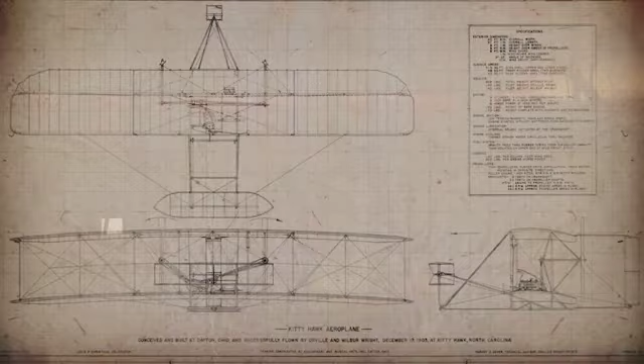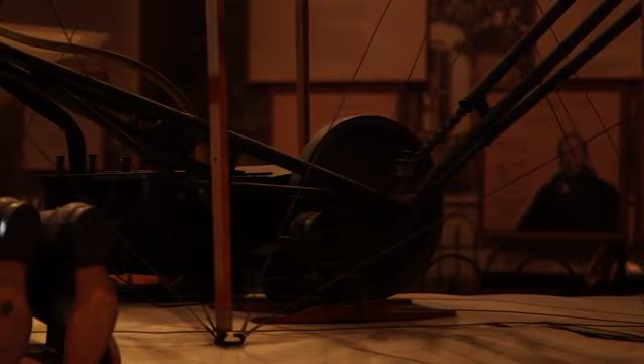The engine they needed had some very specific requirements. It had to be much lighter than most internal combustion gasoline engines of their day, but it didn't need to be very sophisticated, because the Wright brothers had so successfully designed their airplane that they just needed a very low horsepower engine to get it in the air. They designed an engine that was very simple, with no carburetor, no fuel pump, and it generated 12 horsepower, 4 more than their basic design estimate required. So they thought they would be okay. Turns out their airplane was much heavier than their design estimate, so that extra 4 horsepower really came in handy when they attempted to fly.

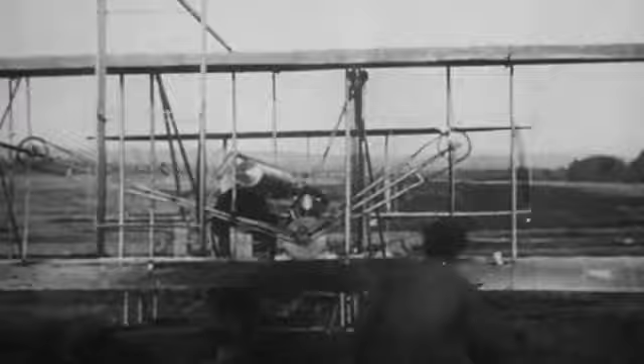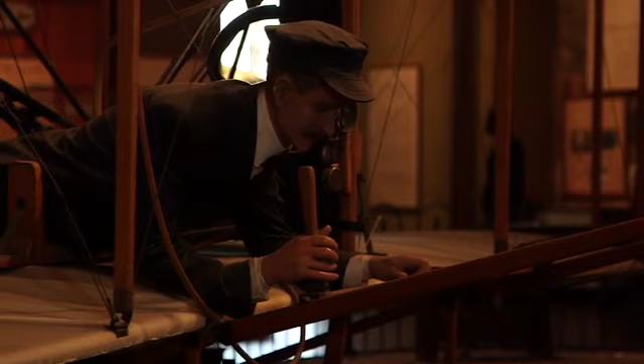The other component of their propulsion system, the propeller, was even more significant, because the Wrights really were the first to conceive of an aerodynamic propeller, as opposed to a ship propeller, which simply pushes the ship along. An aeronautical propeller is really a wing moving in rotary motion, generating a horizontal force we call thrust. Marrying that propeller with their simple internal combustion engine, they created a propulsion system. It's important to think of it as a propulsion system because the Wrights understood that an airplane had many dimensions—a wing, a structural design, a control system, and a pilot—and the propulsion system was one component that had to work together with all the rest. An airplane was not just one invention, it was many inventions, all of which had to work in concert.

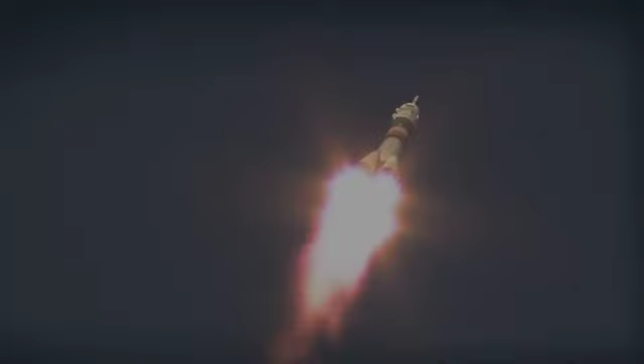Let's take these concepts of lift and drag and apply them to propulsion, which is another of the 4 central forces acting on an aircraft in flight. The entire idea behind propulsion systems is to produce the force needed to move the aircraft through the air, overcoming aerodynamic drag in the process. In modern aviation, there are 2 main types of propulsion systems in use: propeller-driven airplanes, powered by an internal combustion engine, and jet-driven aircraft, powered by turbojet engines, or the often even bigger turbofan engines. We'll focus on propeller aircraft in this lecture and turn our attention to jet engines in the next.

So why have these 2 types of engines emerged to the forefront of aviation instead of other propulsion devices? For example, steam engines were sometimes used in the early days of aviation, but are hardly ever seen today. Or rocket propulsion has been used for some aircraft, such as the Bell X-1, that first broke the sound barrier.

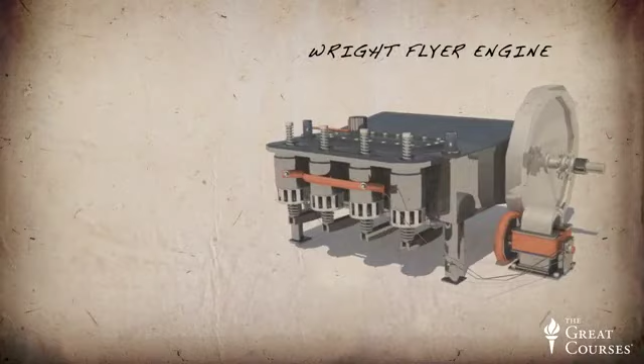It turns out that one of the most important features of a propulsion system is the power-to-weight ratio. We can think of this as a metric for efficiency of the engine—we want to get as much power as possible out of the system while minimizing the weight. This was one of the most critical limiting factors in the early days of aviation. Propulsion systems were available that could produce substantial power, but they were very large and heavy, making them impractical for use on aircraft. Even the Wright brothers' engine had a fairly poor power-to-weight ratio of 1 horsepower per 16 pounds. Following their work, engine performance rapidly improved to values much closer to 1 pound per horsepower. This power-to-weight ratio continues to be a driving design criterion for aircraft designs created today.

What makes jet engines and internal combustion engines so popular is that they operate off of fossil fuels, which have an incredibly high energy density relative to other forms of energy storage. This feature comes back to the problem of weight on an aircraft—the air vehicle must carry around the energy source, that is the fuel, along with the energy conversion device, that is the engine. Other energy storage and conversion methods are available, such as solar cells, fuel cells, batteries, chemical rockets, and even nuclear propulsion.

However, none of these methods can currently match the efficiency and lightweight of using fossil fuels in an internal combustion engine. So in this lecture, we'll focus on how internal combustion engines operate to produce power, and how the propeller transmits that power to the air.

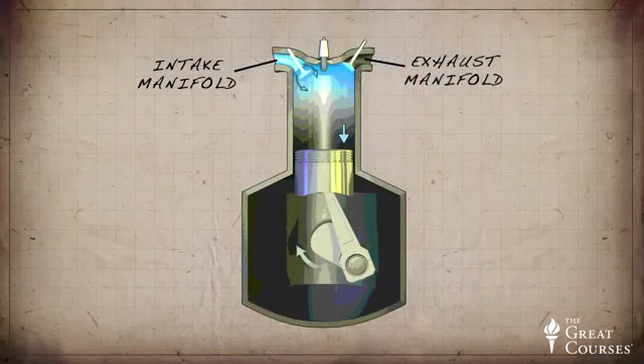Let's start with the discussion of the internal combustion engine. The central function of an internal combustion engine is to convert the chemical energy stored in the fuel to mechanical energy in the form of a rotating shaft. The substantial amount of energy stored in fossil fuels is released by burning the fuel in the combustion event. That energy is then used to push a piston sliding within a cylinder, which then rotates the crankshaft.

Aircraft engines will have a number of cylinders arranged such that each piston is connected to the crankshaft, and the power output from each cylinder contributes to the rotation of the shaft. The firing of the cylinders is timed such that the combustion events are spread evenly throughout the complete rotation of the shaft. The arrangement of the cylinders can be in a radial configuration around the perimeter of the engine, all in a line for the inline configuration, or in a V configuration with 2 rows of cylinders arranged in a V shape.

Let's take a closer look by examining this schematic of a 4-stroke engine. The 4-stroke engine is so named because there are 4 key segments of the entire cycle of its operation. The first stroke of the piston within the cylinder is the intake stroke.

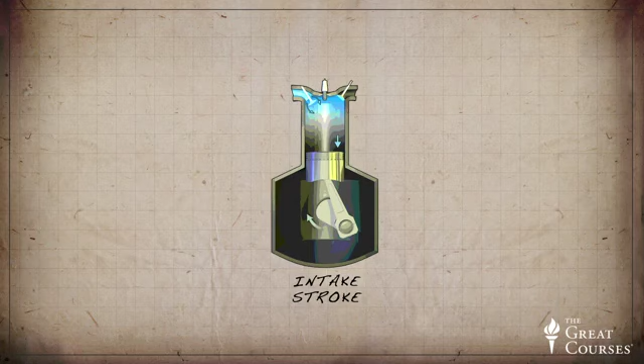During the intake stroke, valves on one end of the cylinder open in order to allow a mixture of fuel and air into the cylinder. The next stroke is the compression stroke, where the piston compresses the fuel-air mixture within the cylinder by decreasing the volume. During the compression stroke, the pressure of the fuel-air mixture increases dramatically.

At the conclusion of the compression stroke, the volume of the fuel-air mixture within the cylinder is at a minimum, and the pressure is at a maximum, and the spark plug is fired. With the firing of the spark plug, the volatile fuel-air mixture ignites and rapidly releases the energy through this combustion event. That combustion process rapidly and substantially increases the pressure of the contents within the cylinder.

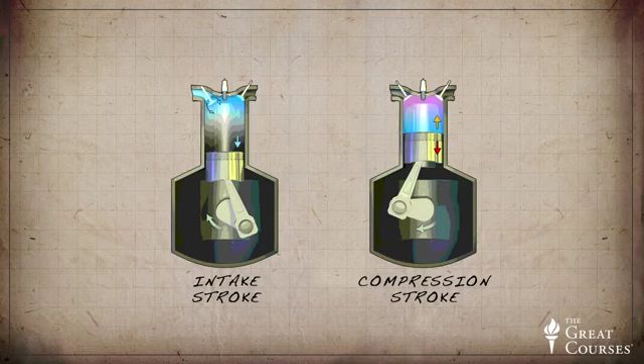This higher pressure then applies a very strong force on the face of the piston, pushing it back down through the cylinder. From the point of spark plug ignition, the third stroke of the piston initiates. This portion of the cycle is called the power stroke, which is when all of the energy from the combustion event is used to force the piston downward, increasing the volume of the mixture.

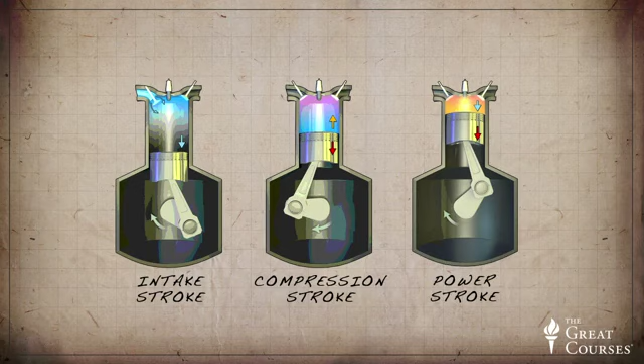The energy from the combustion event is transmitted to rotation of the crankshaft by the piston and its connecting rods. Following the conclusion of the power stroke, the fourth and final stroke initiates when the piston is at the bottom of its stroke. A second set of valves opens, allowing the byproducts of the combustion event to be exhausted from the cylinder. The piston moves upward, pushing the combustion products out of the cylinder through the exhaust manifold.

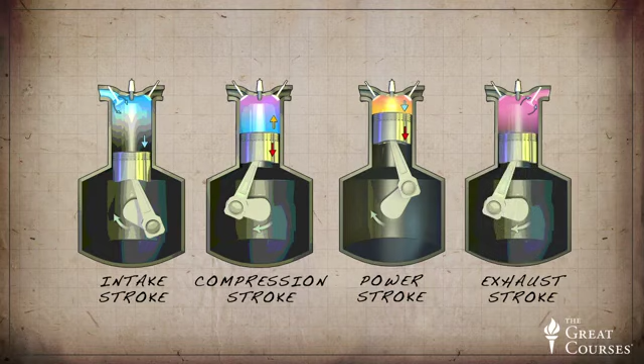So, in summary, a 4-stroke engine is composed of the intake stroke, the compression stroke, the power stroke, and the exhaust stroke. Let's take a deeper look at the function of the internal combustion engine by considering a plot of the pressure versus the volume of the contents within the cylinder. We call this a PV diagram.

If we plot points on this diagram corresponding to each stroke of a 4-stroke engine, we can see how the pressure and volume varies throughout the cycle of the engine. From that, we will be able to see how much work the engine is producing and what we might be able to do to improve the performance of an engine.

If we begin with the start of the intake stroke, we'll note that as point 1 on the PV diagram. As the piston moves, the pressure within the cylinder remains approximately constant because the intake valve is open. However, the volume of the contents increases substantially due to the movement of the piston. Let's mark the conclusion of the intake stroke as point 2.

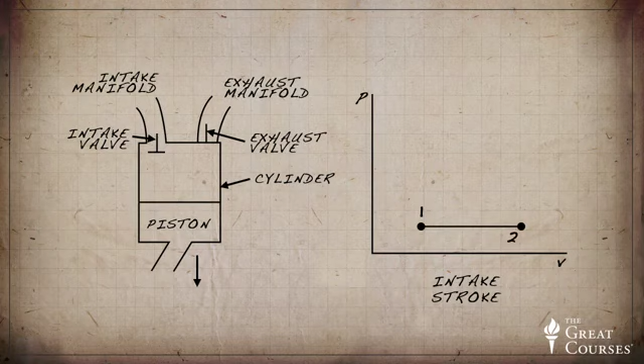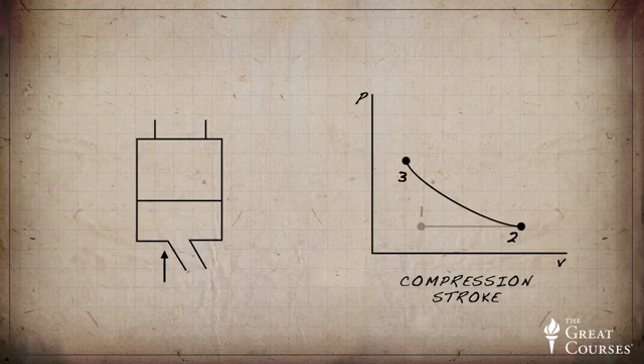Now, moving into the compression stroke, the volume again decreases due to the upward movement of the piston, and the pressure increases at the same time. This is because all of the valves on the cylinder head are closed, and the contents of the cylinder are compressed. The conclusion of the compression stroke is noted as point 3. The power stroke will be represented by 2 segments. The first is the combustion event, represented between points 3 and 4 on the PV diagram.

Here, the spark plug is ignited, and the contents of the cylinder are rapidly burned. This combustion process takes place within a very small fraction of the overall cycle. The pressure within the cylinder dramatically increases due to the release of chemical energy in the combustion event.

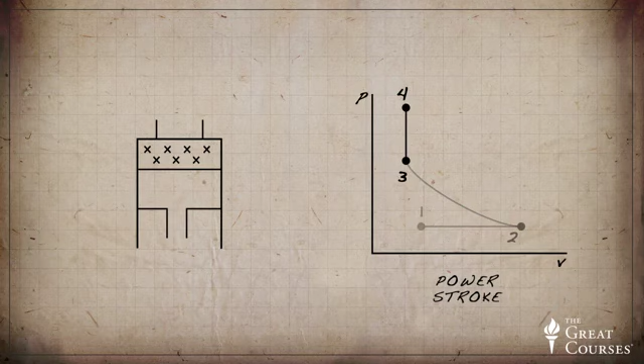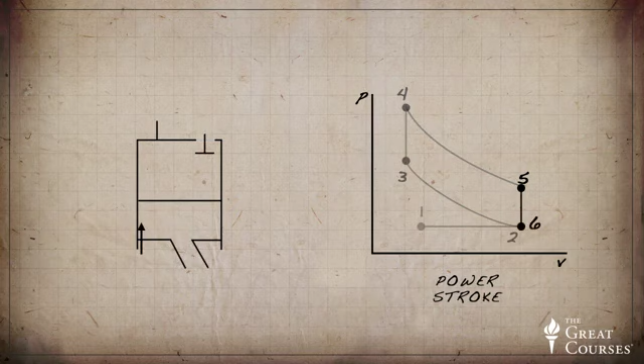The power stroke then continues, moving from point 4 to point 5, where the volume of the cylinder is increased as the high pressure pushes the piston downwards. At the conclusion of the power stroke, the exhaust valves are opened, which quickly relieves the pressure within the cylinder, so the pressure drops from point 5 to point 6.

This marks the beginning of the exhaust stroke, which continues from point 6 back to our initial condition of point 1. Between point 6 and point 1, the volume of the cylinder decreases and the pressure remains constant as the piston pushes the exhaust gases out of the cylinder to refresh the conditions for the next combustion event.

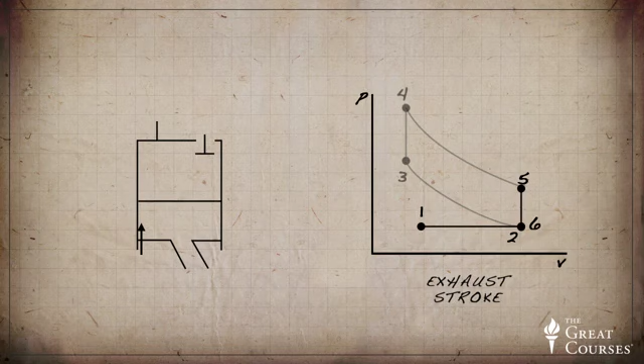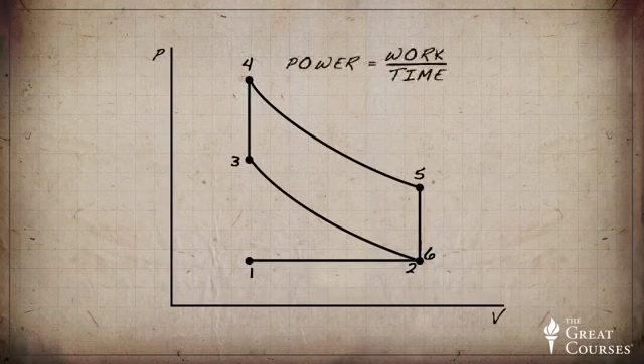Now, this PV diagram can tell us some important things about how the engine performs. Power is defined as work per unit time, and mechanical work is equal to the force times the distance that the object is moved. So to maximize power output, we need to maximize the force applied to the piston and the distance that the piston moves, while doing that within a minimal amount of time.

Here, the force acting on the piston head is related to the area of the piston face, the cylindrical cross-sectional area, and the pressure acting on the piston, since pressure is force per unit area. So higher force will result from higher pressure acting on the fixed surface area of the piston face.

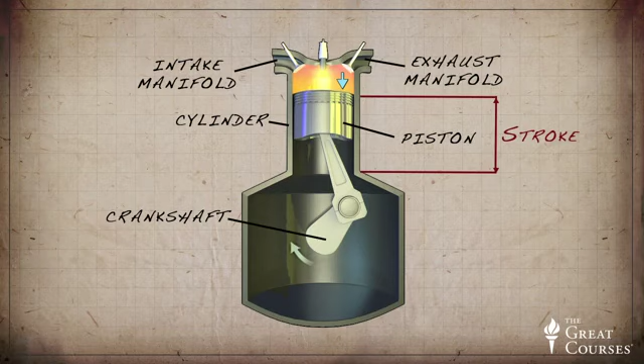The distance that the piston moves is called the stroke. Larger stroke results in larger displacement and more work done. Stroke is also related to the displacement of the cylinder, which is basically the volume of the cylinder swept by the movement of the piston head.

Keeping these ideas in mind, we see that we want to increase the pressure excursion between maximum and minimum pressure acting on the cylinder, and we want to increase the volume swept by the piston in order to maximize power. Based on these thermodynamic principles, it turns out that the amount of work done by the gases inside the cylinder on the piston is equivalent to the area encompassed by the cycle from points 1 through 6.

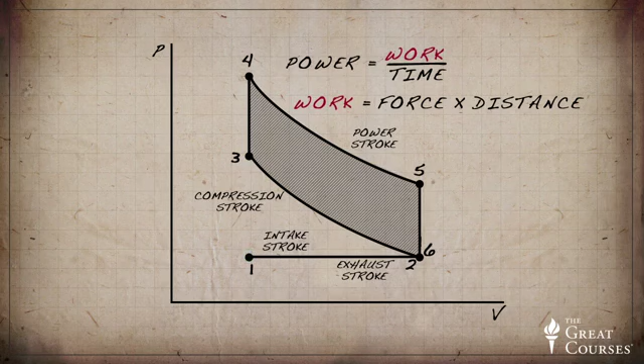Before the ignition event, during the compression stroke, the pressure and temperature increase because the movement of the piston is adding energy to the air, because it's doing work. And following the ignition, the air in the cylinder does a lot of work on the piston, with a net positive work output.

Let's take a look at how the temperature of the air in the piston changes throughout the cycle through a demonstration. I have a small cylinder with a piston that I'm going to use to compress the air inside. I also put a bit of tissue paper inside, which will help us visualize what is happening to the air temperature. My goal is to burn the paper.

But let's see if the temperature will get hot enough. How hot does it need to be? Well, if you've ever read Ray Bradbury's Fahrenheit 451 novel, you'll probably recall that the combustion temperature of paper is 451 degrees Fahrenheit. Let's see if we can get that hot.

Wow, very nice. So if we assume that all of the energy I put into the cylinder through work went into heating the air inside, then thermodynamics tells us that the temperature rose to over 1,000 degrees Fahrenheit. So the compression stroke is definitely adding energy to the air in preparation for ignition.

Now let's consider the impact of pressure in a little more detail. The pressure that the engine can supply to the cylinder is directly related to the ambient air pressure. You'll recall from our second lecture that atmospheric pressure decreases as we go up in altitude. So naturally, the power that can be produced by an engine diminishes as an aircraft climbs to higher altitude.

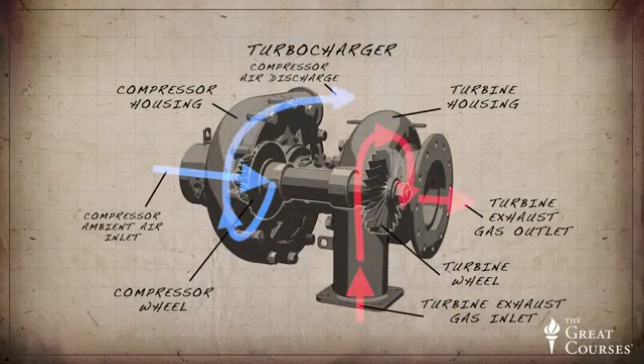This is exactly what can be done with a supercharger or a turbocharger. These two devices essentially perform in the same way. Each boosts the pressure and density of air delivered to the intake valve with a compressor.

We're at the Aviation Institute of Maintenance in Manassas, Virginia, where we're going to talk about the turbocharger and the supercharger. The function of these is to deliver high-pressure air to the intake manifold to be able to fly an aircraft at high altitudes, because we have to have enough air for the combustion event.

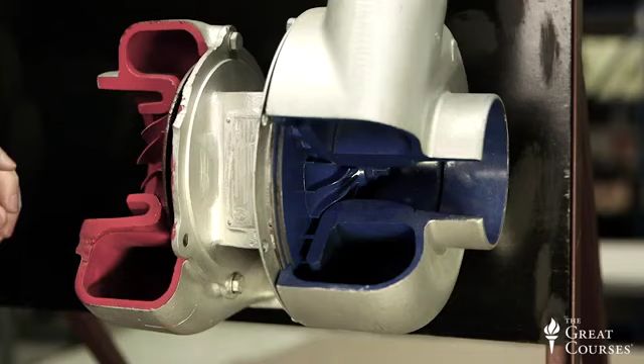The turbocharger actually operates off of the waste energy in the engine exhaust. That exhaust gas comes through and is passed through this turbine right here. As it passes through the turbine, it's pulling energy out of that exhaust and driving a shaft connected to the compressor here. The compressor turns and sucks in air through the inlet here and is a radial compressor and sends it back out to this radial exit here to deliver high pressure air to the intake manifold.

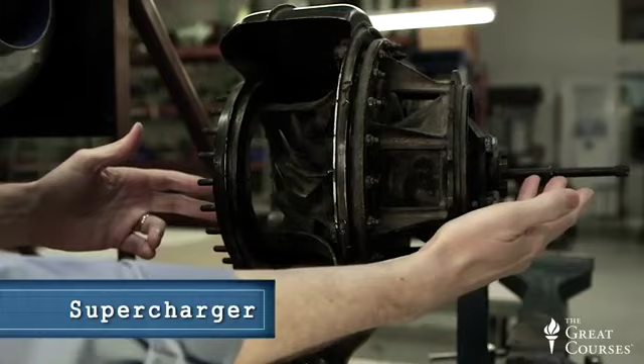Compare that with the supercharger, which instead of driving off the exhaust gas has a shaft here connected to the main drive of the engine to drive the compressor, but otherwise the function is the same. It pressurizes the air through this radial compressor to deliver that high pressure air to the intake manifold.

So let's consider the implications of what we found. Higher displacement or volume of the cylinder will result in higher power output. Also, the more cylinders we have working together, the higher the power will be. And the faster the cylinders fire, the more work is done per unit time, so the power output of the engine goes up. Finally, higher pressure allows more fuel to be burned and will give higher power output.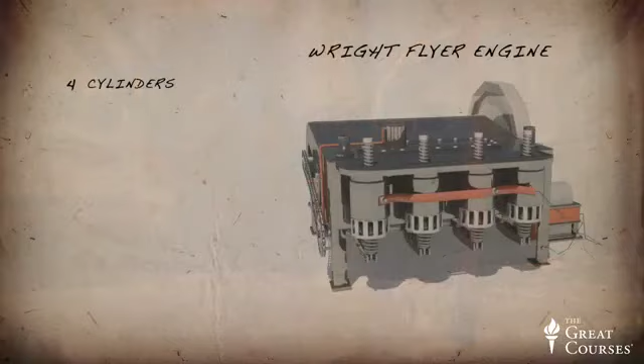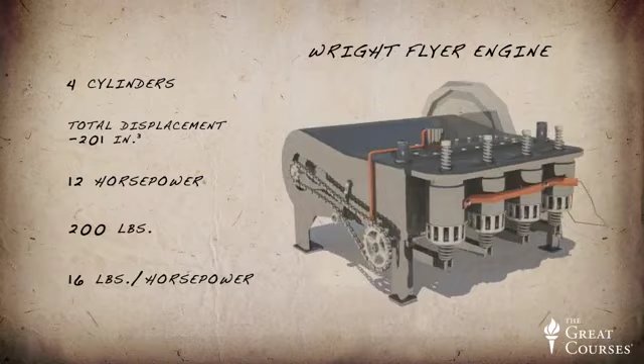These factors are reflected in the progression of engine technology that we've seen in engine development. The Wright Flyer's engine had 4 cylinders with 201 cubic inches of total displacement. The engine produced about 12 horsepower with a weight of 200 pounds, giving it a power loading of about 16 pounds per horsepower. Compare this with the stats of the Rolls-Royce Merlin, a liquid-cooled V12 which was used on the

P-51 in World War II. This engine had 12 cylinders, each with 137 cubic inches of displacement. This packed much more punch, giving 1,580 horsepower while weighing in at 1,640 pounds. The power loading of the Merlin was 1.04 pounds per horsepower, much better than that of the Wright's engine.

One of the major drivers of engine technology that we haven't yet addressed is the vexing problem of how to cool the engines. The combustion events produce a significant amount of heat, which is directly transferred from the combustion gases to the cylinder walls. This heat must be effectively removed from the engine in order to prevent warping of the cylinder head and ultimate destruction of the engine.

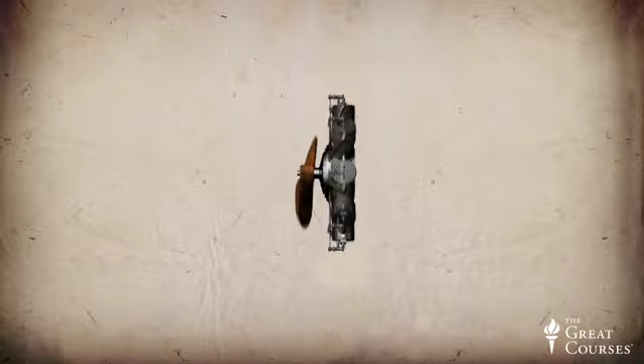Two key cooling technologies are convective cooling via airflow over the cylinders or liquid cooling via circulation of coolant around the cylinder heads. Each of these techniques can substantially increase the weight of the engine, and so engine cooling was a key area of technology development that improved engine performance in the early days of aviation.

The engine that the Wright brothers used on their 1903 Flyer employed evaporative cooling of a fluid. It turned out that this technique wasn't very efficient and only enabled operation of the engine for a period of several minutes before the engine overheated.

Engine designs in the earliest days of aviation then quickly pivoted to air cooling, which involves direct airflow over fins mounted on the cylinders. In order to maximize the flow of air over the cylinders, the radial engine was invented, where each cylinder was equally exposed to the oncoming flow.

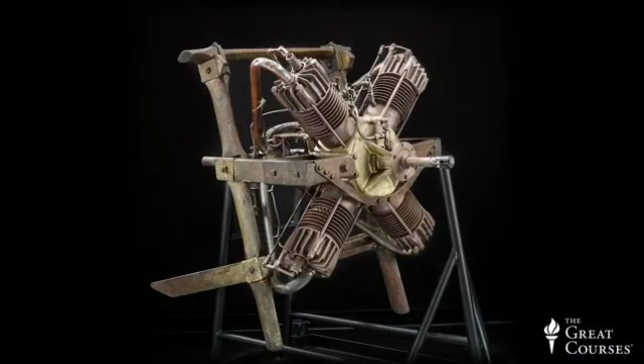However, air-cooled engines had the limitation of limited cooling when the aircraft was on the ground or in low-speed flight. This frustration led to the ingenious development of the rotary engine, which rotates the entire engine around the crankshaft. This afforded the advantage of continuous movement of the cylinders relative to the surrounding air, resulting in air cooling even when the aircraft was stationary on the ground.

Ultimately, however, the rotary engine suffers from mechanical problems associated with rotating the entire engine assembly due to the very high inertia associated with rotating a heavy engine. The size and ultimately total power output of the engine was limited. Furthermore, there were challenges associated with effective lubrication and reliability. Thus, the rotary engine quickly fell out of vogue near the end of World War I.

Despite these challenges of air cooling, radial air-cooled engines continued to be used throughout the interwar era. The 200 horsepower Wright J5 Whirlwind engine was used by Charles Lindbergh on the Spirit of St. Louis and won the Collier Trophy in 1927 for its advancements to the state-of-the-art in engine technology. Also, due to the robust nature of air-cooled designs, with fewer moving parts, the engines tended to have robust performance. For this reason, the US Navy used many air-cooled designs throughout the interwar era and into World War II.

Liquid cooling is the other major method for removing waste heat from the combustion process. The huge advantage of liquid-cooled engines is that airflow over the engine block is not required for cooling. This allows for effective cooling no matter what the speed regime is. Sudden changes in power level and accompanying thermal stresses due to changes in air cooling are not a significant problem. Furthermore, the cylinders can more easily be arranged in line without worrying about maintaining undisturbed airflow over subsequent cylinders. A long arrangement of inline cylinders produces a much more slender engine block, which allows the aircraft fuselage to be more streamlined with less drag. For this reason, liquid-cooled engines were very popular with military aircraft designers, where speed was of paramount importance.

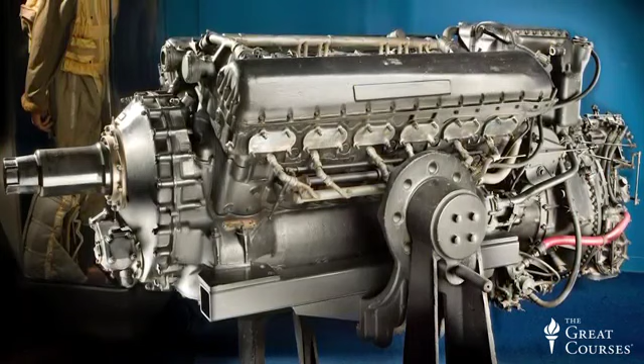A good example of this type of engine is the Rolls-Royce R, a V12 supercharged liquid-cooled engine with 2,239 cubic inch displacement and 2,350 horsepower at 3,200 RPM. With a weight of 1,640 pounds, it had a power loading of 0.65 pounds per horsepower. This beauty of an engine was tightly integrated into the Supermarine S6B, which was flown at 340 miles per hour to claim the 1931 Schneider Trophy for the fastest seaplane.

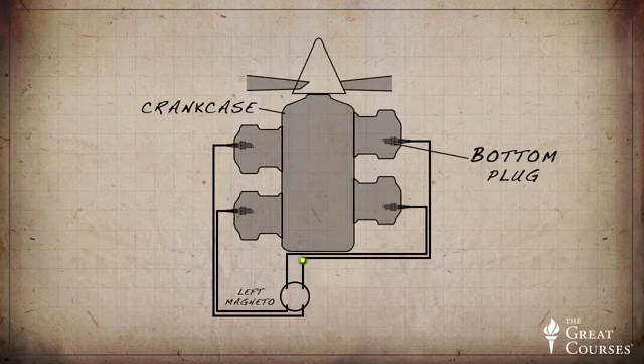Now, as we wrap up our discussion of internal combustion engines, let's touch on the topic of how the spark plugs are fired. Unlike car engines, which distribute power to the spark plugs via the car's electrical system, an aircraft can operate with absolutely no electrical power on board. This is done through the use of ignition magnetos, which generate pulses of high voltage by the rotation of permanent magnets. The magnetos will produce electrical pulses needed to fire the spark plugs as long as the engine is rotating.

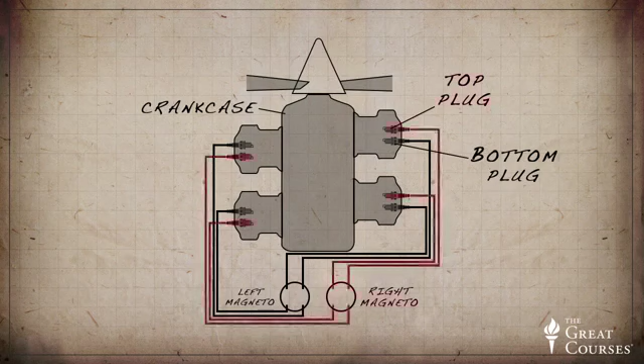Since redundancy is so important on an aircraft, nearly every engine has 2 spark plugs for each cylinder, as well as dual magneto systems. If one spark plug gets fouled, or if one magneto set fails, the other should keep on operating and producing enough power to make it safely to an airport.

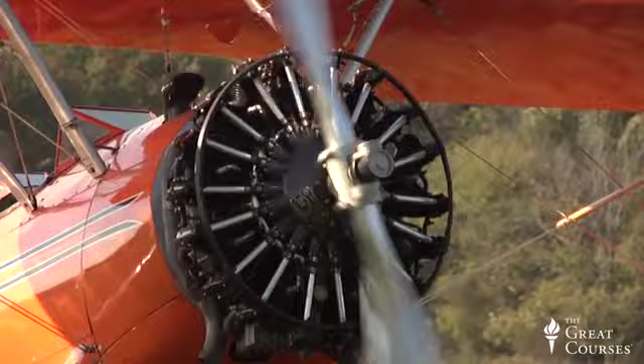For aircraft such as older versions of the Piper Cub that have no electrical power on board, the propeller must be initially rotated through some means in order to get the engine started. This can be done with a pilot in the cockpit, holding the brakes tightly, and a buddy who hand rotates the propeller and quickly ducks out of the way as the engine fires up.

For those aircraft that do have an electrical system, the engine can be started via an onboard battery and starter. However, the magneto ignition system is still used, since it adds a level of robustness and safety. The magneto ignition system allows the engine operation to be entirely self-contained and independent of the aircraft's electrical system.

I speak from personal experience, having found that this level of redundancy is extremely helpful. One time on a night flight, I experienced an electrical system failure in flight. The alternator failed, and the battery completely drained over time. Despite this, it was very comforting to know that the engine would keep on humming along without missing a beat, even without the electrical system being present. I just had to find my way home in the dark.

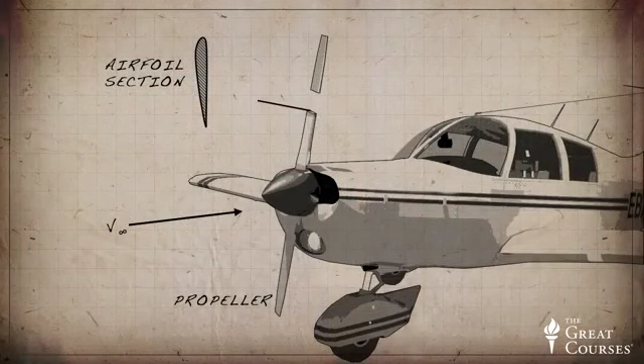Let's now turn our attention to the propeller. Once we've generated all of this horsepower at the shaft of the engine, the propeller is what transmits that power to the flow to actually pull or push the aircraft forward. We can think of the propeller as simply a rotating wing, composed of a series of airfoils that produce lift. Since the airfoils are rotating about the longitudinal axis of the aircraft, the net lift force produced by the propeller results in thrust that is oriented in the direction of flight.

It may seem like a simple concept, but there is some nuance to how a propeller is designed and operated. We'll consider 2 key ideas about propellers. First, if you've ever looked at a propeller up close before, you've noticed the twist of the blade from the root to the tip.

Here's the twist of the blade from the root to the tip. Second, it turns out that the efficiency of the propeller depends significantly on the forward flight speed and the rotational speed of the propeller. Even though there are efficiency problems at off-optimal conditions, there is a way of working around that. So let's dive in.

Now, it's important to set the correct vantage point for thinking about propellers. Even though they are sometimes referred to as air screws, it's not accurate to think of a propeller as screwing through the air as though the air were a solid mass. Instead, it's best to think of the propeller as a rotating wing. It is this rotating wing that produces the lift that accumulates into an overall thrust vector that propels the aircraft forward and overcomes aerodynamic drag.

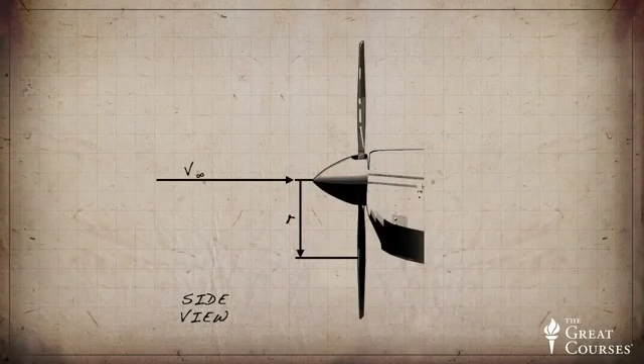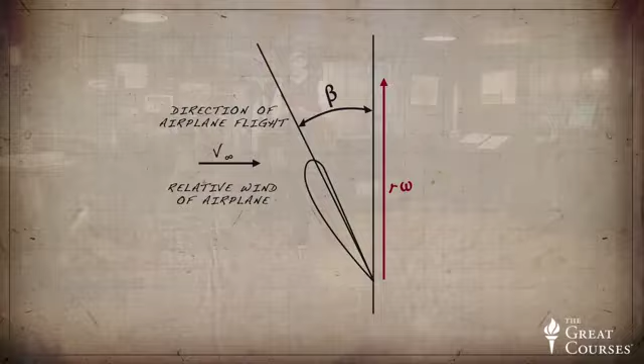We'll need to take a look at the propeller performance by considering individual cross-sections of the blade. Each cross-section is an individual airfoil. However, the velocity seen by the airfoil has some significant differences from what is seen by the wing. Since the propeller is rotating, the net velocity at the airfoil section is a combination of the aircraft's velocity with the tangential speed of the propeller at that spanwise location. This tangential speed is the angular speed times the local radius.

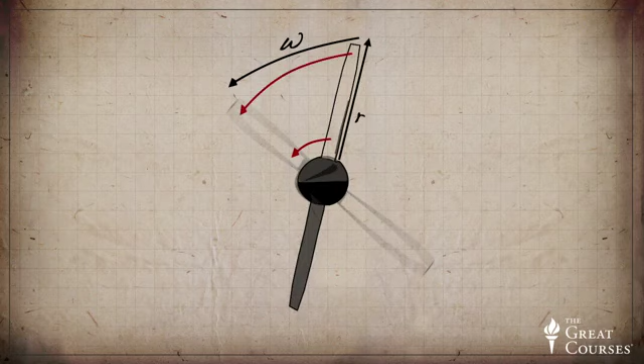For locations on the propeller blade that are very close to the hub, the tangential speed is very low since the radius is small. However, at the propeller tip, the tangential speed is at its highest since the radius is at the maximum extent. It turns out that this spanwise variation in tangential speed has a significant impact on the propeller's design. The best way to understand this is to visualize the local velocity seen by a particular airfoil section along the propeller span through the use of velocity triangles.

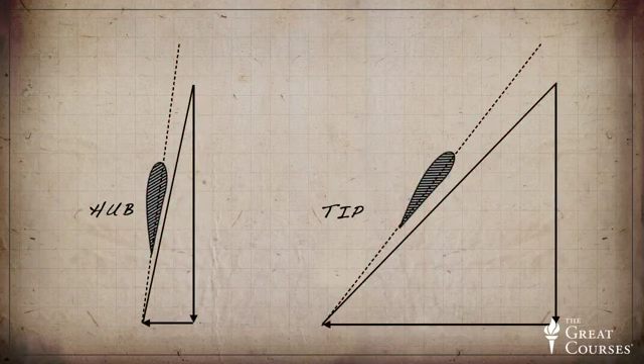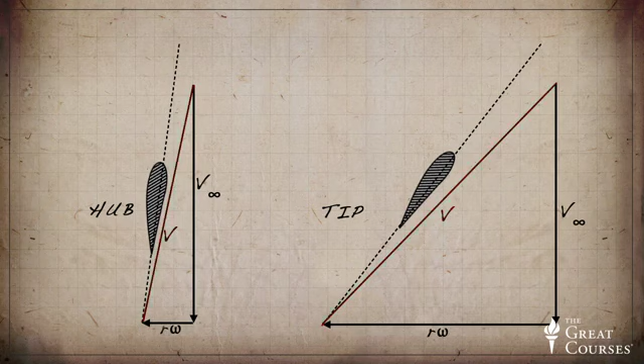Let's consider two spanwise locations, one near the propeller hub and one near the propeller tip. At each location, the aircraft's flight speed is the same, which we'll indicate as v infinity. The tangential speed at the hub is very low, since the radius there is small. When we add these two velocity vectors together in a head-to-tail fashion, we can draw the hypotenuse of the triangle to indicate the net velocity experienced by the propeller airfoil section at that location. At the hub, since the tangential velocity is so low, the angle of the net velocity vector is very high with respect to the plane of the propeller's rotation. At the prop tip, however, the tangential velocity is very high, making the angle much shallower with respect to the propeller plane.

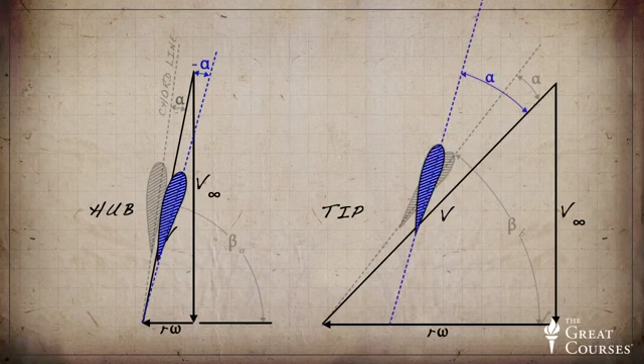Now, if the propeller's airfoil sections all had the same pitch angle, the angle of attack of the flow at the propeller hub would be very low. In fact, the angle here would likely be so low that it would be negative, producing extra drag instead of thrust. At the blade tip, on the other hand, the angle would be so high that the local flow would be separated and the tip would be stalled. Thus, the blade must be twisted in order to optimize the airfoil pitch angle relative to the local angle of attack.

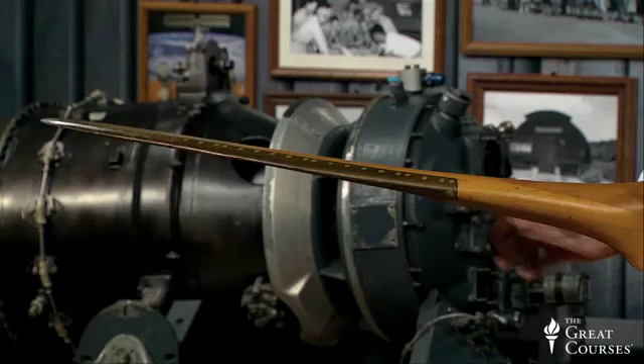At the blade root, where the angle with respect to the prop plane is so high, the blade must be pitched to a very high angle in order to get a reasonable angle of attack. As the location along the span is increased, the flow angle decreases and the blade pitch angle must be reduced in order to maintain the same appropriate angle of attack. Thus, the blade pitch angle changes along the span from very high pitch angle to a very shallow pitch. This is due to local variations in flow angle. This twist of the blade is characteristic of every propeller on an aircraft.

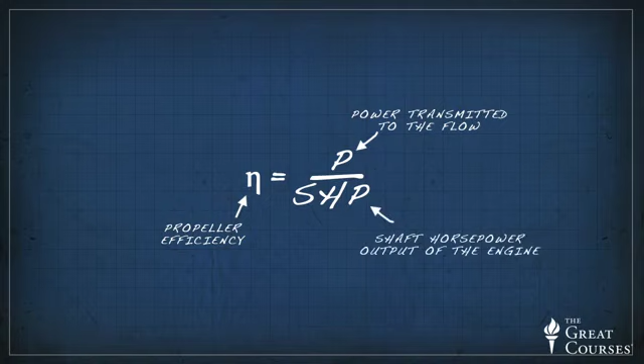Let's now talk about the efficiency of the propeller. We can define efficiency as the ratio of the power supplied to the flow divided by the shaft power produced by the engine. It's an indicator of how well the propeller does its job of transmitting the engine power to the flow. For a well-designed propeller operating near optimum conditions, the efficiency can be near 85%. It turns out that there is an optimum flight condition where the efficiency of the propeller is optimized.

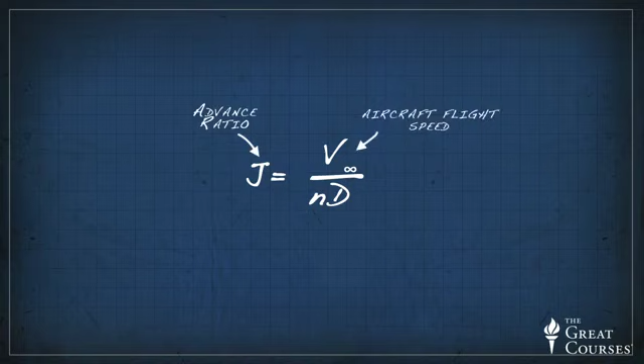In order to effectively describe this optimum condition, we need to introduce a non-dimensional parameter that is a ratio of how far the propeller moves forward divided by how far the propeller rotates around its radius. This parameter, termed the advance ratio, is determined as a ratio of the aircraft flight speed divided by the product of the rotational speed and the diameter of the propeller.

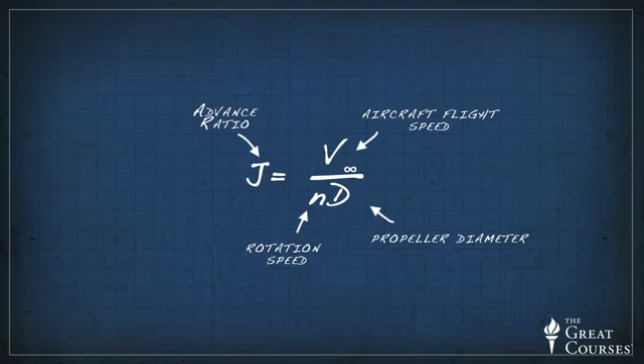At low advance ratios, the flight speed of the aircraft is very low relative to the prop rotational speed, while at high advance ratios, the flight speed is high relative to the rotational speed.

We can now introduce the characteristic propeller efficiency curve for a propeller. This is a plot of propeller efficiency versus the advance ratio.

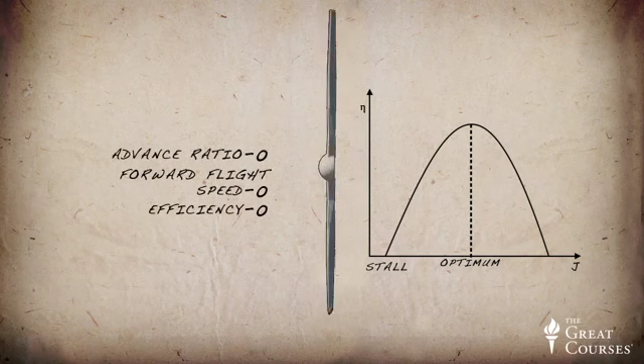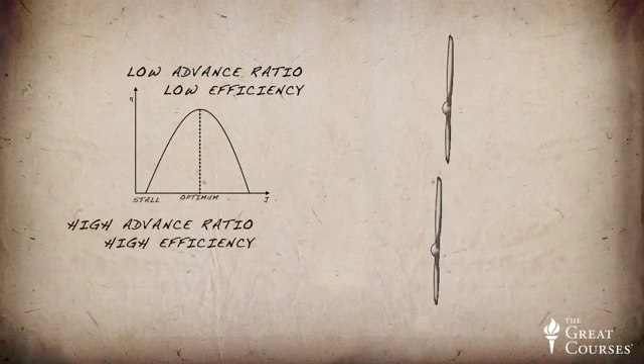When the advance ratio is 0, the forward flight speed is 0, so no thrust is produced and the efficiency is 0. Essentially, at low advance ratios, the flow over the propeller is predominantly stalled, so the efficiency is very low. As flight speed goes up, the angle of the relative velocity vector goes down, the angle of attack decreases, and the flow angle approaches the optimum angle across the span of the blade.

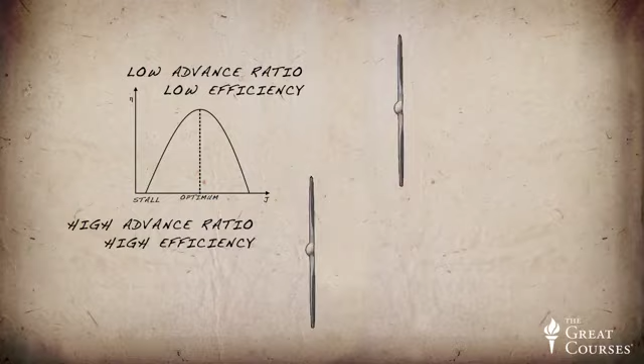At peak efficiency, we can say that a well-designed blade will have optimum angle of attack across the span of the blade, where the maximum amount of lift is being produced by each airfoil section.

The prop efficiency must always be less than unity, since there will always be drag, even at the optimum condition. This drag takes the form of both parasitic drag and induced drag.

Now, when we move to even higher advance ratio, the efficiency begins to decrease again from the optimum condition. This is because the flow angle is increased such that the angle of attack over some portions of the blade is negative and lift is lost.

In fact, the local angle can become so low that drag is produced over some portions of the span instead of thrust. The overall efficiency drops off rapidly with increasing advance ratio until the point where efficiency drops to zero.

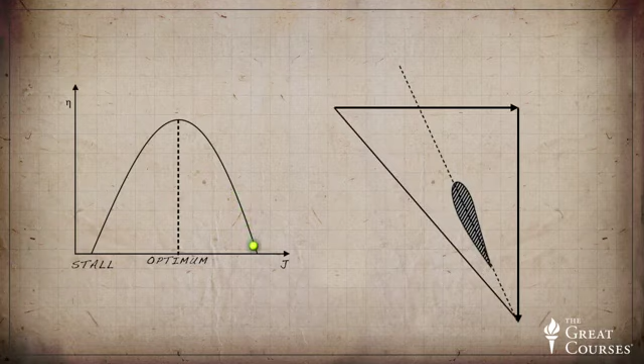At even higher advance ratios, the propeller actually acts as a windmill, producing net drag instead of thrust.

So clearly, there is an optimum advance ratio that should be flown for a fixed pitch propeller. However, it's not easy to change the rotation speed of the propeller without changing the power output from the engine. Most propellers are directly mounted to the crankshaft without any gearing, due to the simplicity of this setup. So the power needs of the aircraft dictate the RPM, which dictates the advance ratio.

If the aircraft operates over a wide velocity range, then the advance ratio will also vary across a wide range, and the propeller efficiency will be suboptimal over a wide range of the aircraft's operating conditions. Is there any way to decouple this?

Yes. This idea is what led to the variable pitch propeller, which reached maturity in the 1930s. This development enabled much higher flight speeds by allowing the pitch of the propeller to be controlled to match optimum conditions throughout the flight envelope.

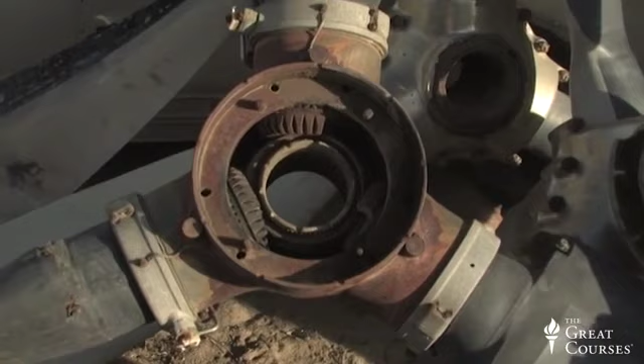An associated development is that of the constant speed propeller, which has a governor at the hub of the propeller to automatically adjust the blade pitch in order to maintain constant rotation speed. In this way, the engine and constant speed propeller work in concert with one another to maintain optimum operating conditions for the engine and propeller throughout the operating envelope of the aircraft.

Okay, let's summarize. The basic idea is that engine and propeller work together to transmit power to the flow, which pulls the aircraft forward. The four-stroke cycle of the engine—intake, compression, power, and exhaust strokes—serves to effectively extract energy from the fuel and transmit that energy to the crankshaft.

The crankshaft then turns a propeller, which has an optimum advance ratio, the ratio of flight speed to prop rotation speed. This optimum condition can be changed by using a variable pitch propeller or even automatically controlled by using a constant speed propeller.

Now to wrap things up, have you ever wondered why propeller-driven aircraft are still out there flying today? With the advent of the jet engine, which we'll discuss in the next lecture, why haven't jets taken over completely as a dominant propulsion system for all types of aircraft?

Simply put, the reason is that propeller-driven aircraft are more efficient than jets over the range of speeds at which they both can fly. However, propellers do not perform well at higher flight speeds.

The drag rises dramatically as the local Mach number on the blades goes up. In fact, the local Mach number at the propeller tip can easily approach Mach 1, where shock waves would form and increase the drag substantially.